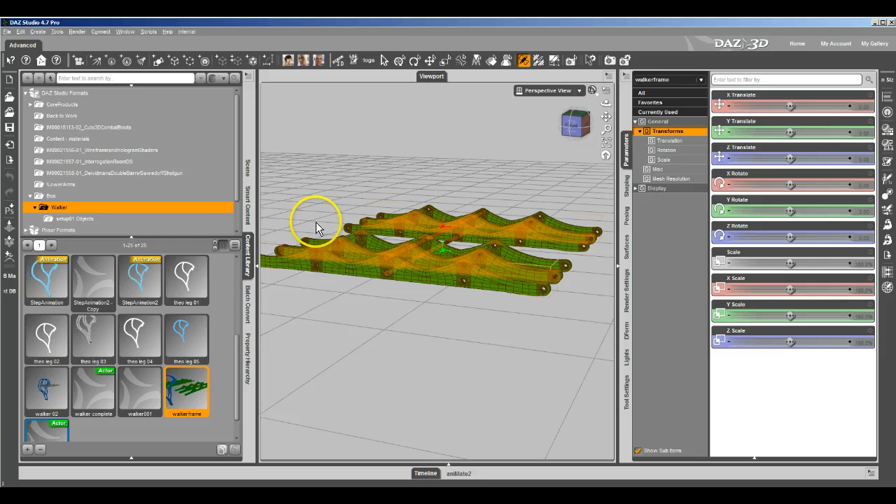But there's the walker frame. And what is this? Just an OBJ. I know I loaded it a couple times, but it's just an OBJ because I got tired of having to hunt down the OBJ.

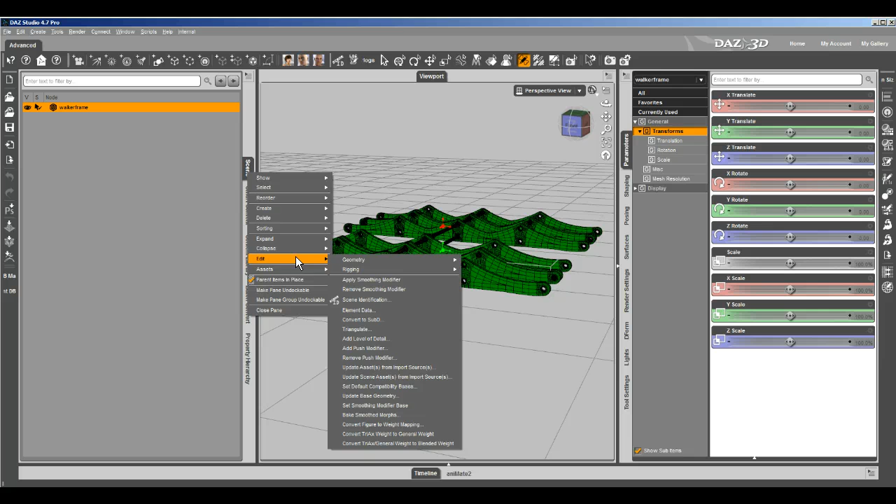So I imported it once and then saved it out as a figure prop asset. I'm going to go ahead and change it into a figure though, because I'm going to need it that way later. To do that, you take the prop, come over here to edit and then rigging and go change prop to figure.

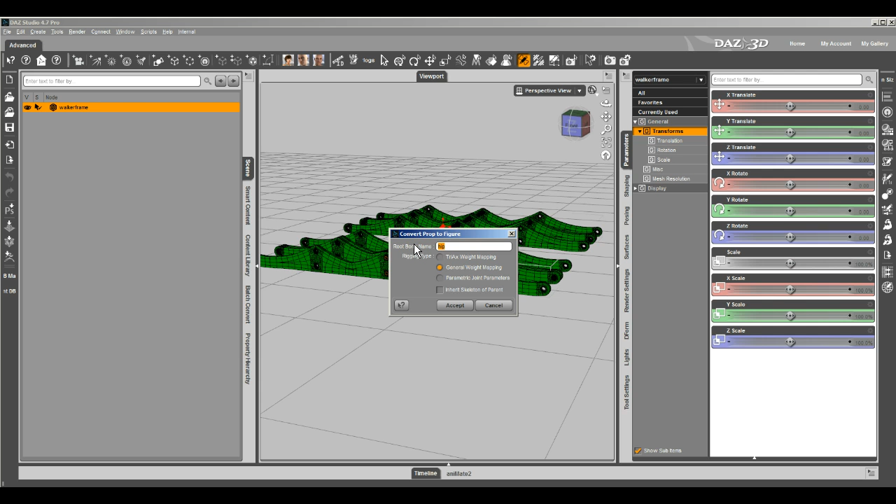I'm just going to go with general weight mapping because I don't need all the triax stuff. I'm going to uncheck inherit skeleton of the parent because there is no parent for one, and because if I didn't, it would come up with the root bone as hip, which is a silly name for this walker. So I'm going to change that to frame, and I'm not going to bother cleaning up the name because I'm just trying to get this done at this point.

And I went and resaved out. I made all the legs using the cool technique where you basically move it and then move the geometry, then move the rigging, memorize the rigging. Don't forget to memorize the rigging. You save it out and then you do that search and replace on the actual files to change the name so they come out differently.

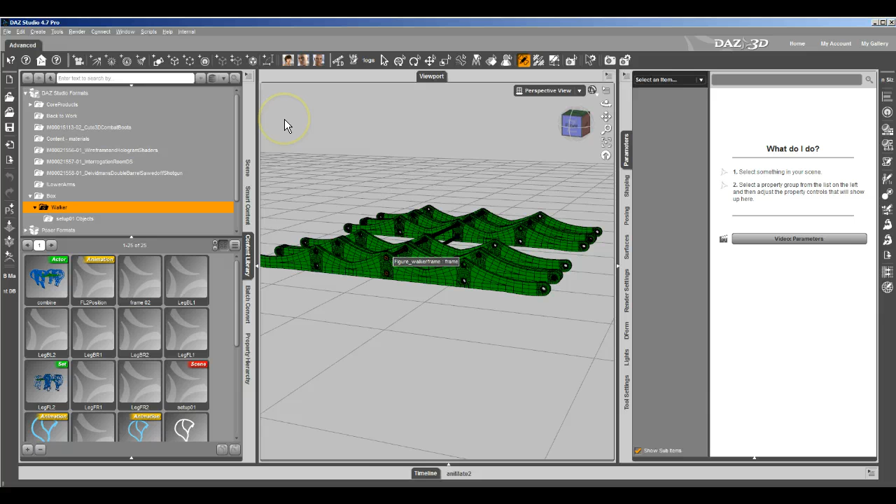If I unselect that - now these I've already messed with and set up. I think except for the 2, I don't remember if I did FL2, which is the one that I showed making. Yeah, I already tweaked it. Alright, so there's all 8 legs plus the frame.

Right, and you can see the legs are all offset a little bit. Whoops, what was that? That's so that it can walk, because if all the legs are in the exact same position all the time, it would fall over rather than walk.

And because I saved these all out, they were parented and fit to at the time, so everything's all weird. But they should be parented to the main frame. Are those 2 parented to the frame? No. Let me get those 2 parented to the frame. So it should all be parented to the frame, and they should all at this point be followers.

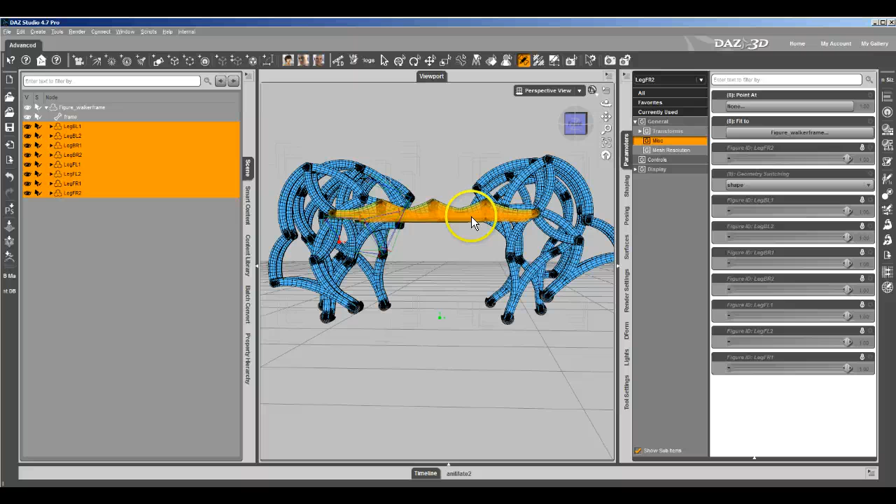And some of them are, some of them aren't. I'm just going to go like that and make them all. Now if we look at this one, and we go to the controls, you can see it's got the modulo dial set to a default of 0.8, which of course pushes that to 8 or 80. And that's that offset value.

I sat down the other day when I did this the first time through and figured out - you can't really see from there, you can see the ground plane - but I figured out where the foot came into contact, at what point in the step, and at what point in the step it left contact with the ground. So if I do that, you can see it comes into contact at 0.8, and then it goes through, rolls past 0, and it's at 0.2 or thereabouts where it comes back off the ground.

So those are the values I used for that one anyways. But then I just shifted that range. It's 4 because it rolls over, so you go 8 and you go 9, 10, and then you start back over at 1 and 2, and that's 4 steps forward or whatnot. Got it all set up.

Did all sorts of try runs, used a little bit of math theory to figure out what the value on each relative leg would be, so that they all lined up nice, so that you always had 2 feet on the ground, one on each side, front and back. You'll always have stability there, so it doesn't tip over, even though it's a 3D model. It wouldn't tip over unless you made it tip over. It'd be silly to look like it's going to tip over.

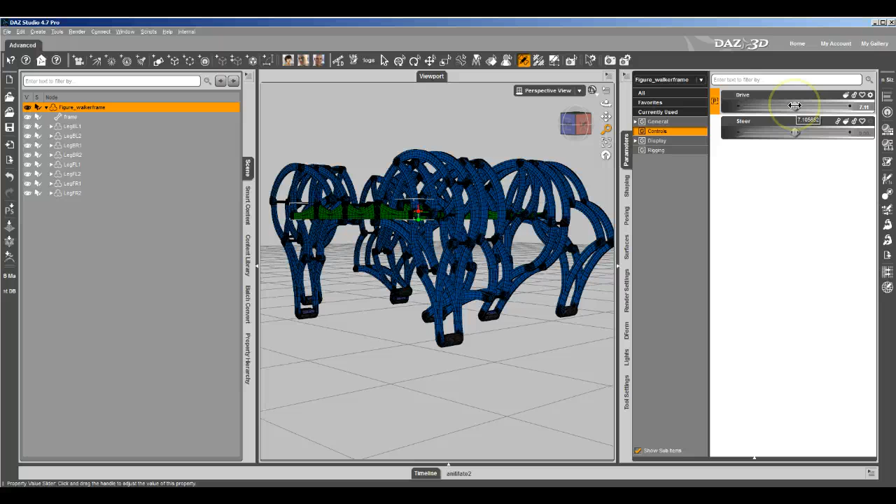Restore that. Here's the steering dial. The steering dial's got limits -1 to 1. Basically, the way I'm going to treat that is like a steering wheel. If you go that way, it's going to turn. If you go like that, pretend we're driving it - we take the dial all the way that way, it's going to go that way, which is left.

So at -1, we want the left legs to actually be running backwards because it steers like a tank. So I want the legs on the left side to all go backwards, and it's the offset that we've set up to do that because it's the multiplier that controls the speed. In this case, it's going to be -1, which will be the speed, so it's actually running backwards at full speed.

Offset, that's what I'm looking for. Here's the offset dial, so we'll throw all these offset dials. And because there's no change to the right legs, we're not going to adjust them yet, because when it goes to -1, we don't want the right legs to do anything. So we're going to go ahead and ERC freeze these 4 settings here.

It's the left legs running at a speed of -1, I guess is the way you can phrase that. Alright, so that's set up now, and you can't actually see it do anything because it's a multiplier and there's no value of drive. It basically multiplies the drive on each individual leg, and there's no value.

We'll go ahead and set up the other half. Now, because we got the limits of those offset dials set at -1 and 1, and their default is 1. Even though I've hooked up the ERC, so when these left legs go to - when the steering dial is at -1, the left legs will go to -1.

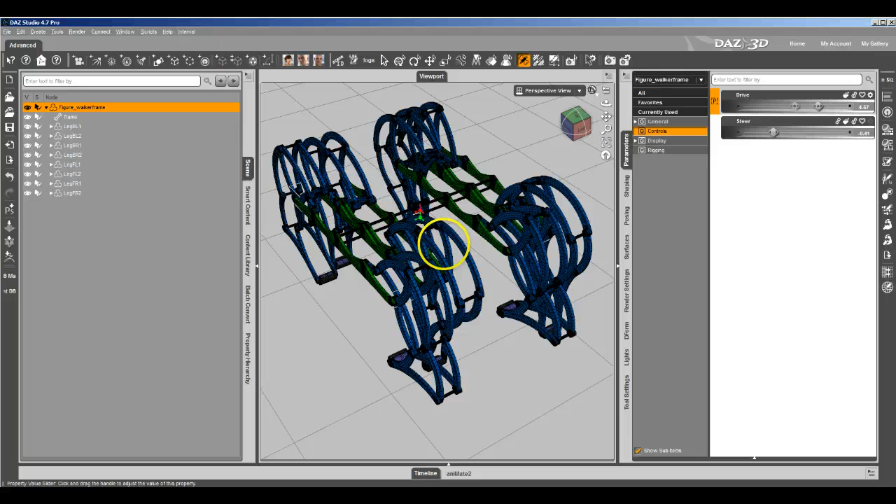That goes really slow. So if we dial it now, you can see the legs on the right side are rotating at their normal speed, and the legs on the left side are moving really slow. Maybe you can't see that because the video is jumpy, but it is, trust me.

What I'm going to do now is just trying to remember what I'm doing next.

I'm going to try and do this without closing Studio and saving, because I've done that a couple of times. Whenever you're messing with the geometry, doing updates to the geometry, or any of that deep complicated stuff, especially what we're going to do next, it's a good idea not just to clear out the scene, but to restart Studio, because it doesn't always work — Studio is doing an awful lot of stuff and things go weird, especially with all this going on.

I've got the walker, and you can drive it. So you're like, well, that's pretty cool, obviously, but it'd be great if you didn't have to do that with so many figures.

It's great because you can use it. You got 8 — so yeah, you got these 8 independent figures, kind of complicated rigging, and they're all virtually identical. They've got complicated rigging, a lot of dialing stuff going on. It'd be a pain in the neck to have to do that 8 times.

So you do it once and convert it over. You wind up with 8 figures plus the frame itself, so you've got 9 figures, which probably has some overhead. I'm not totally sure if 9 figures is more memory intensive than one larger figure, but it's kind of awkward — it does look kind of weird.

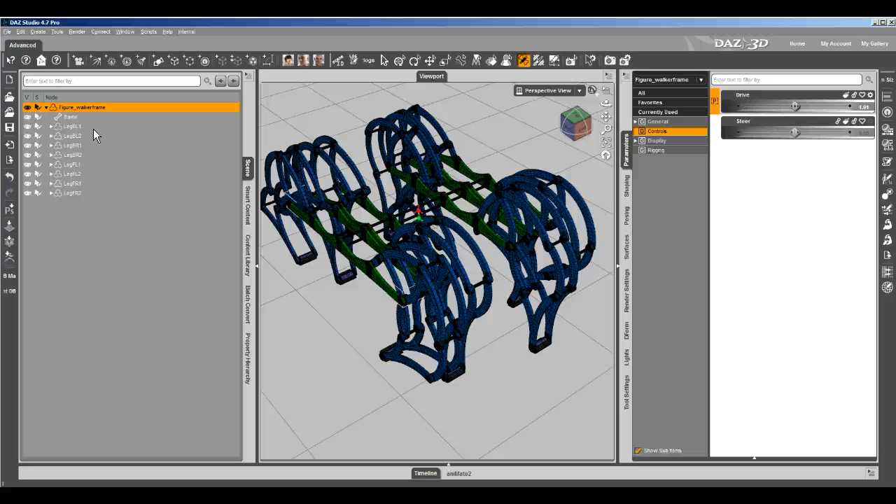And the users — it'd be great if we could clean that up basically and have just one figure without having to do everything individually. Fortunately, we can, if we're lucky, because like I said, Studio gets kind of weird sometimes, especially when you're doing this.

So what I'm going to do is select the legs, and I'm going to unparent them real quick, or unfit them. Yeah, I'm going to unfit them — did I unparent? Yeah, they're unparented, unfit. I'm going to take one, and then I'm going to reparent it. I don't know why I unparented it instead of just leaving one fit. There we go — I'm going to parent it, fit it, do all that stuff.

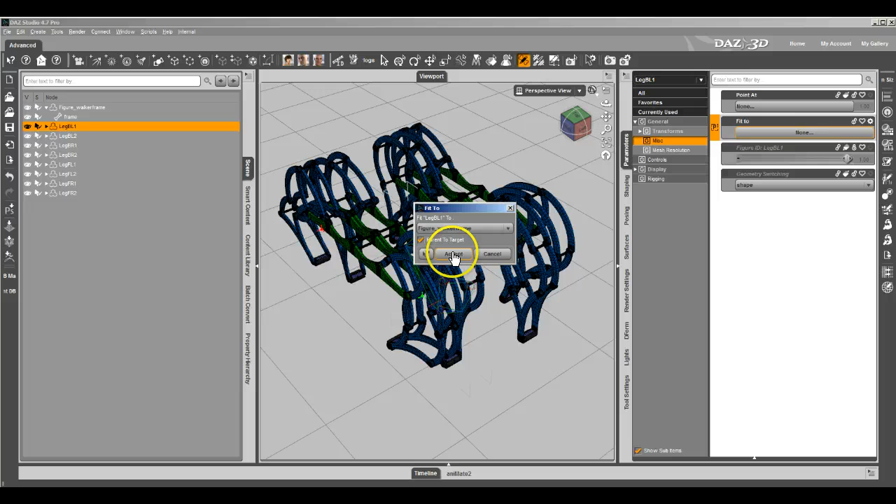I'm going to hide those just to make sure. I don't know if — you know what, I think I did have them hidden before when it worked. Maybe that was the trick. So I'm going to hide all the stuff I don't want involved in the next step.

So I got one leg, it's fit to — it has to be fit to. You got to have a figure here, you got to have a figure there, they both got to be triax figures. I don't know that they both have to have the same type of weight mapping, but not having the same type could probably cause issues. Pretty much anything could potentially cause an issue with what's about to happen here, because it's silly complicated, but it's awesome cool.

I forgot the actual next point, but yeah, here's figure there, figure there. I'm going to select the main figure.

I'm going to come over here to the geometry editor — it used to be the polygon editor, still looks like a polygon editor. Now it's the geometry editor because he added all sorts of a wider range of geometry stuff. If you came over to tool settings, we don't need to, but you can see it's got polygons, you can do lines, you can do the actual verts, and you can do all sorts of cool stuff. One of the cool things you can do...

...when you've got a figure parented to another figure, and that's where I was going — the rigging, everything's got its unique name. All the morphs have all the face groups. Everything is totally separate, unique between the legs, between the figure itself, or between the frame. Everything's unique, differently named, so there's little to no chance that there's going to be overlap or confusion internally for Studio regarding what is what.

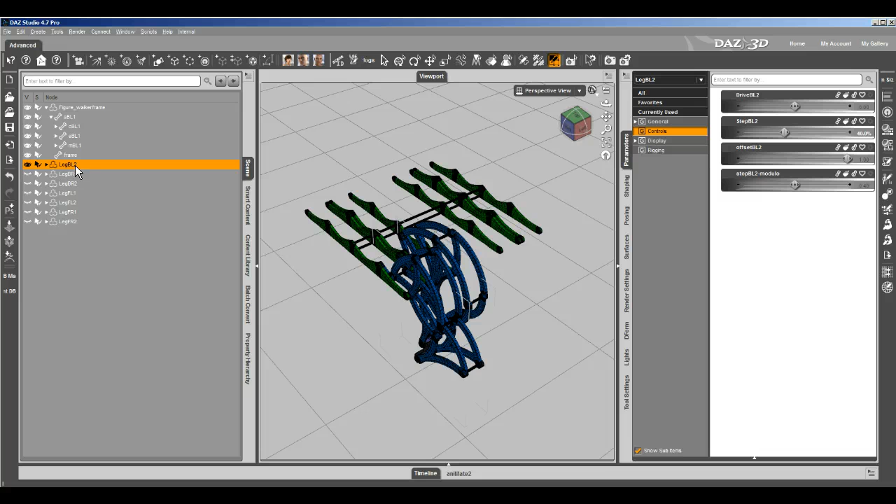I'm going to do it again with this leg here, just because I messed it up. I'm going to hit that button. I'm going to take that leg there, and we'll go General, Miscellaneous, and one more time I'll show you. We go fit it to that. We're going to go ahead and let it parent because it's a good habit to be in. Select the root figure, geometry editing, merge fitted figure. Yes, we're sure. Okay, thank you.

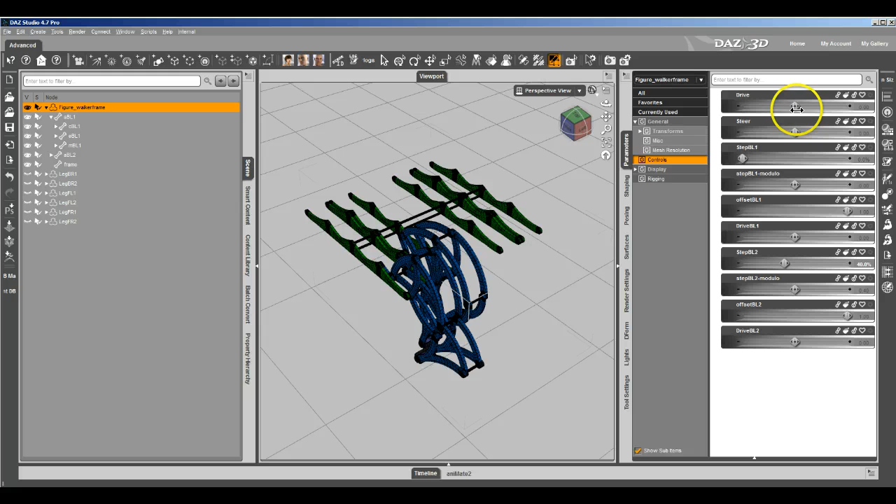And we can delete that one there because we don't need it anymore. And you can see there's the second leg. And again, if we come over here to the controls and dial the drive, you can see that everything's still working fine. You just basically continue along those lines.

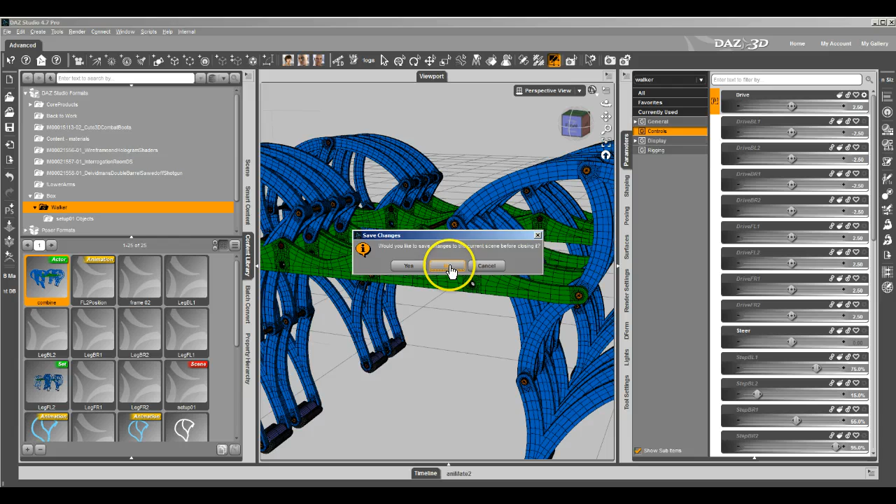I'm not going to continue along those lines. I'm just going to come over here and grab the one I've already done. I think that's it. I can't remember if that's the one that works or the one that doesn't work. That's the one that doesn't work. I'm going to grab this one. There, that's the one that works.

And so here, once you're done, you've combined everything in. These dials here, I'm just going to, the ones that it imported over from the individual legs, and where is steer? It got in there somewhere. Okay, I'm going to select all those.

I'm going to go ahead and hide all those. There's no real reason for the users to be doing it because I've set up everything to go off of the drive and steer dials. So I'm going to hide all those dials. Now the only ones that are actually going to be available, or visible, to the users are going to be that drive dial there.

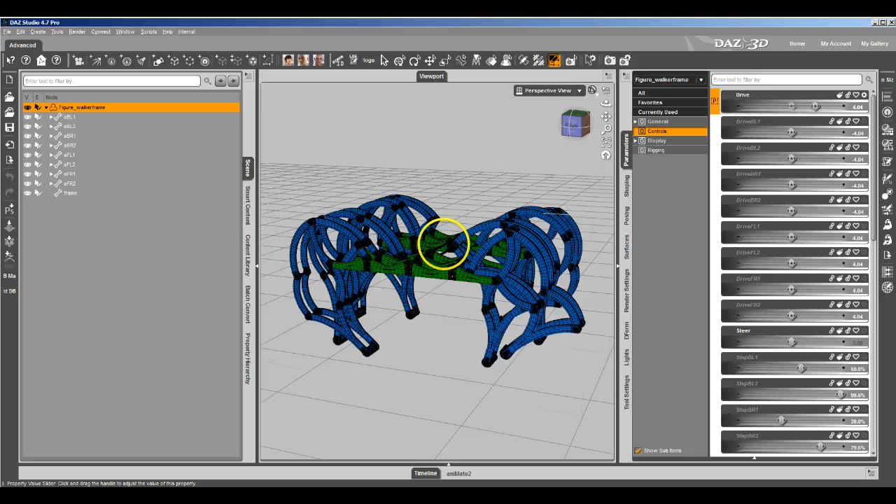There it is. It's very jumpy because of the recording. But yeah, there's the drive dial, and somewhere down here is the steer dial, and you can see it's pushing everything. Everything still works. Make sure you remember to save it out.

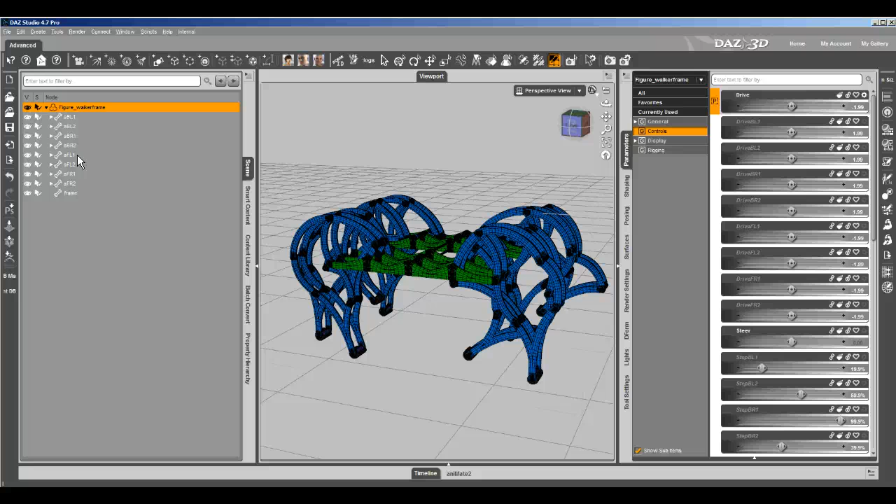But that's basically how you rig this silly, complicated, mechanical walking doodad. That would be a nightmare if you had to do all 8 legs individually, but you don't. You can copy it. You can do the modulo function to turn a straight line dial, just push the dial, push the dial, push the dial, push the dial, into a looping value. Use keyed ERC to make non-linear dials.

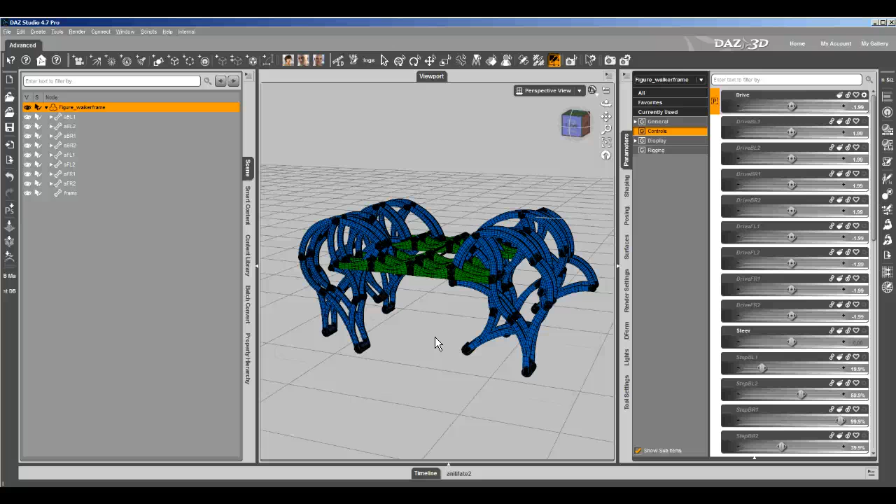You can use update geometry and transfer rigging shape, or transfer rigging figure space, to move an object or move a figure, and you can use that merge fitted geometry to turn two figures into one figure.